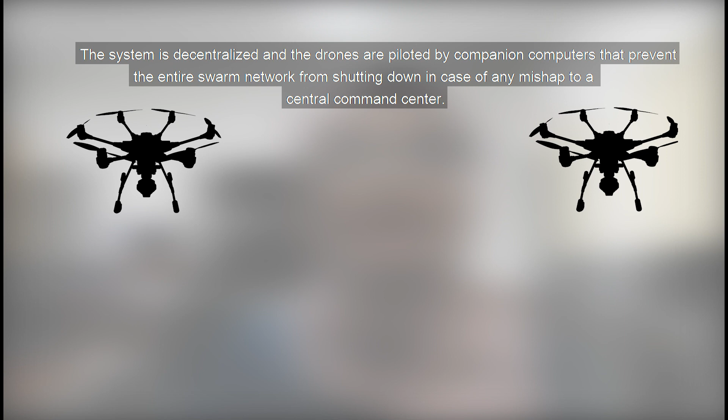For search and rescue operation, we have developed a system that utilizes a swarm of unmanned aerial vehicles to effectively look for search targets by scrutinizing their surroundings in a coordinated fashion. A multi-drone system has been adopted as it is efficient, reliable, and robust. The system is decentralized and the drones are piloted by companion computers that will run the entire swarm network without shutting down in case of any mishap to a central command center.

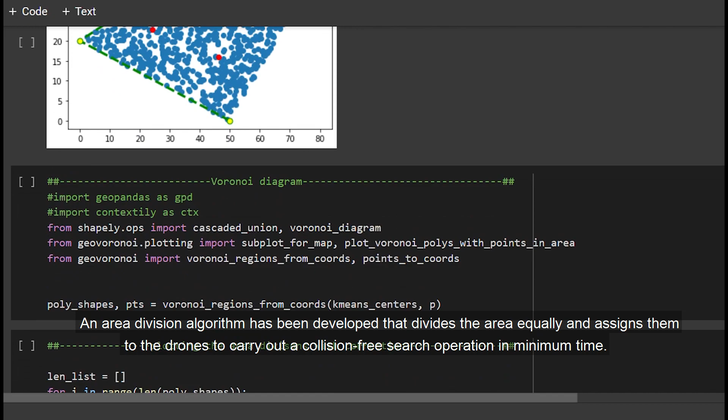An area division algorithm has been developed that divides the area equally and assigns them to the drones to carry out a collision-free search operation in minimum time. A survey algorithm follows that enables the UAVs to inspect their respective areas for ground markers. Throughout the mission, the drones remain in sync via an encrypted mesh networking protocol that ensures secure and reliable transmission.

The design is easily scalable. With slight modification, the system can be adapted for a wide array of tasks such as search and grab, commercial photography, aerial mapping, and geophysical surveys. We chose hexacopters as the multi-rotor configuration since they offer greater stability, last longer, and can carry heavier payloads.

The flight controller chosen was Pixhawk Cube, and the companion computer being used is Raspberry Pi 4B. The GPS system being used is Here3, a high-precision GNSS system. Drones communicate using the Zigbee protocol provided by XBees. The camera being used is a 720p Logitech C310, which has proved to be adequate for our use.

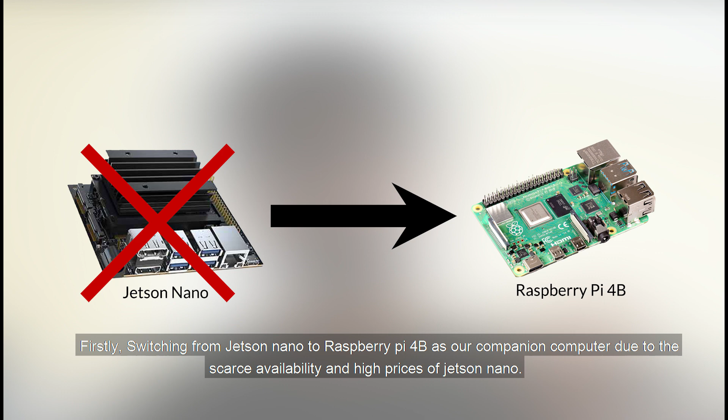Certain changes have been made since the last submission to cut down on our expenditure. Firstly, switching from Jetson Nano to Raspberry Pi 4B as a companion computer due to the scarce availability and high prices of Jetson Nano. Secondly, we dropped from 3 drones to 2 drones due to the high total cost of the required equipment. Thirdly, the 3D printed plate from the bottom of the hexacopter is now attached to the top for ease of assembly.

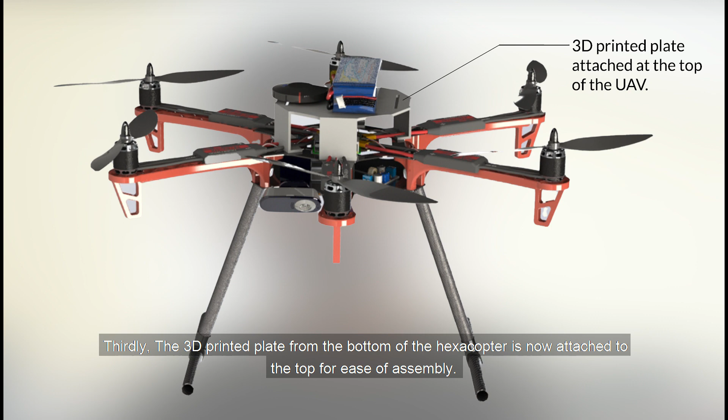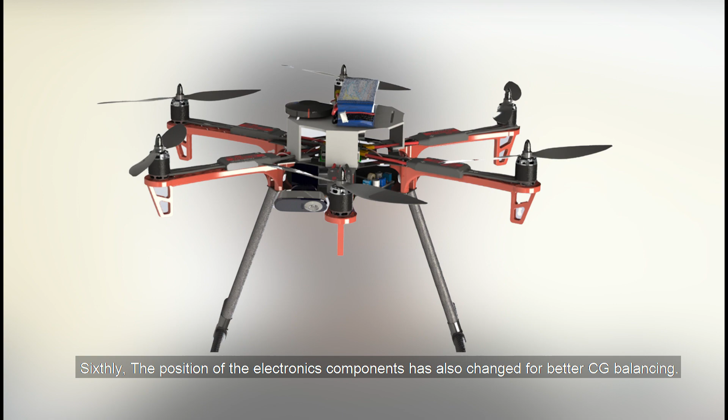Fourthly, a new payload mechanism has been designed and attached to the bottom plate. Fifthly, the gimbal has been removed. Sixthly, the position of the electronics components has also changed for better CG balancing.

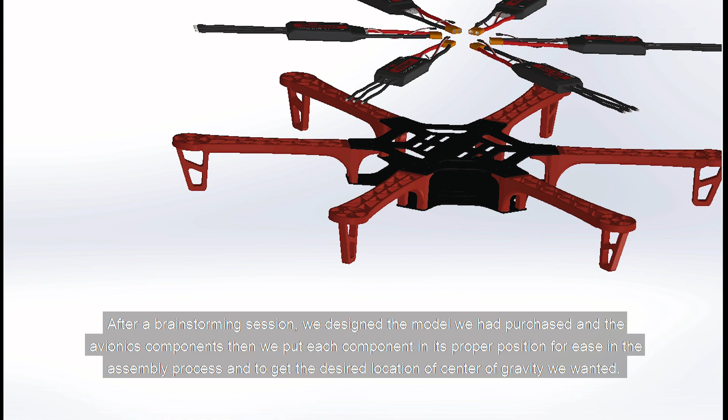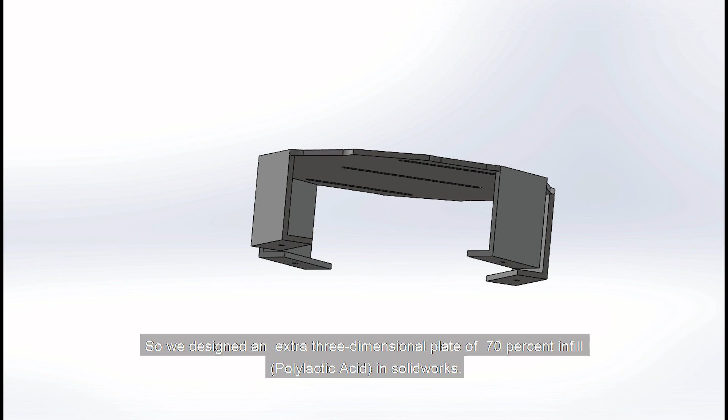After a brainstorming session, we designed the model we had purchased and its components. Then we put each component in its proper position for ease in the assembly process and to get the desired location of center of gravity we wanted. Center of gravity lies exactly at center as planned. We also modified the model according to our requirements, as there isn't enough space on 2 plates to house the hardware. So we designed an extra 3-dimensional plate of 70% infill polylactic acid in SolidWorks. Takeoff mass is around 2.5 kg.

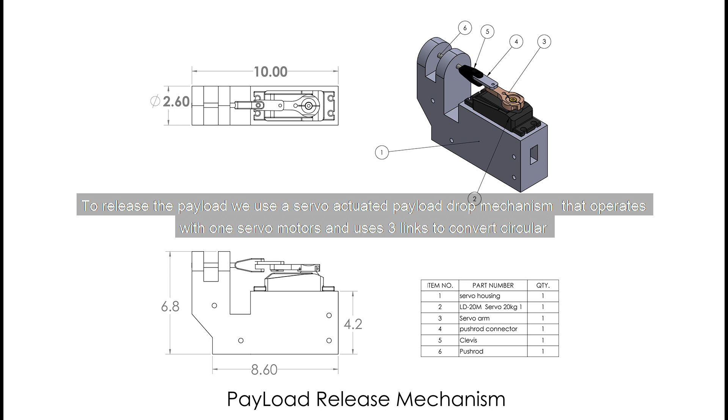To release the payload, we use a servo-actuated payload drop mechanism that operates with one servo motor and uses 3 links to convert circular motion of the servo to translational motion, like a slider crank mechanism, to drop the payload of 100 grams. When the UAV approaches the drop zone, the Pixhawk will actuate the servo which moves the push rod and releases the payload.

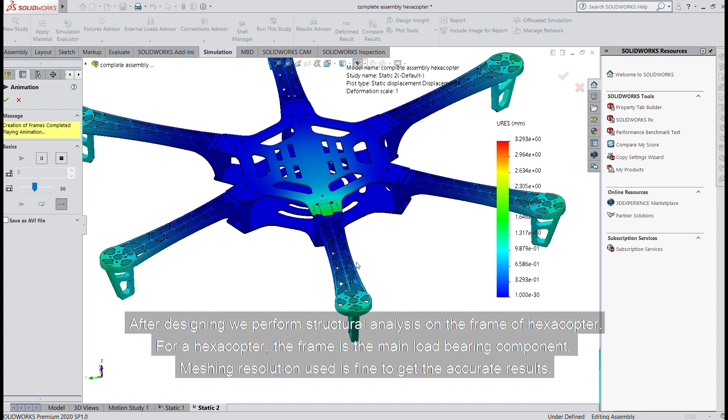After designing, we perform a structural analysis on the frame of the hexacopter. For a hexacopter, the frame is the main load-bearing component. Meshing resolution used is fine to get accurate results. When we apply 20 Newton of thrust on each motor, the displacement is just 3.29 mm and there is very little strain. The maximum equivalent stress obtained is 11.5 MPa as shown. The ultimate tensile strength of the frame material is 120 MPa.

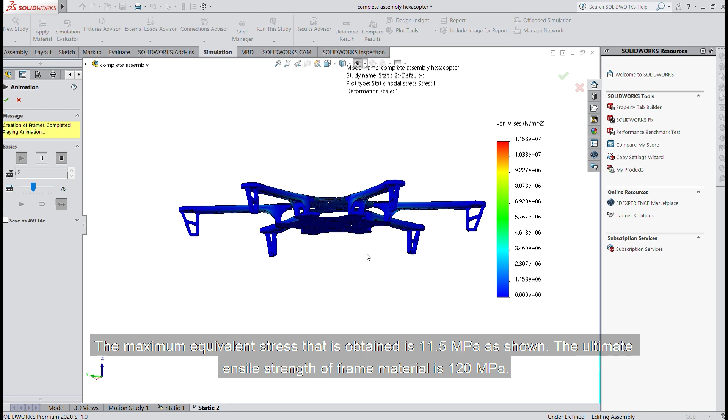Then we conducted a static structural analysis on the upper plate of the hexacopter. When we apply a force of 10 Newton on the top plate, we see very little deformation. Top plate material PLA has an ultimate tensile strength of 42 MPa. The obtained maximum equivalent stress is only 0.5 MPa as shown in the figure. As a result, the 3D printed plate can safely bear the stress.

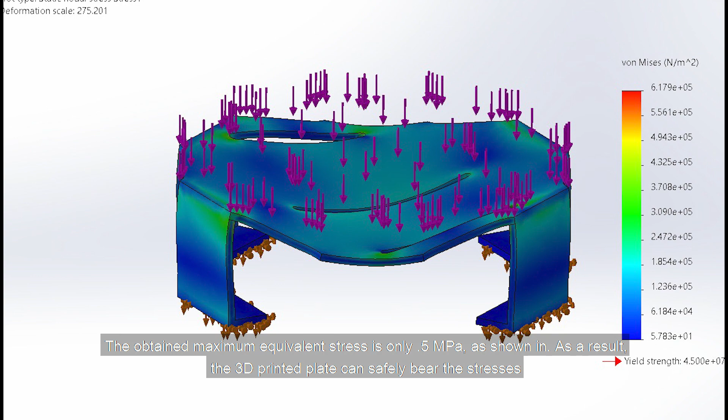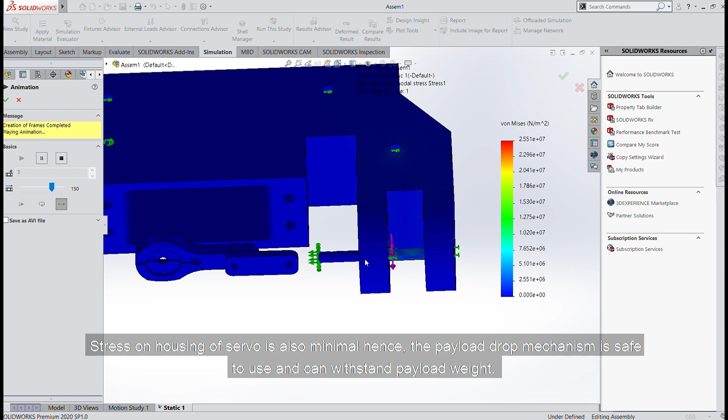In order to check the reliability of the payload drop mechanism to carry a 100 gram payload, 1 Newton of force has been applied on the push rod. It's found that very small deformation occurred on the push rod. The results obtained are within the limit when compared to the tensile strength of the material. Stress on the housing of the servo is also very minimal, hence the payload drop mechanism is safe to use and can withstand the payload weight.

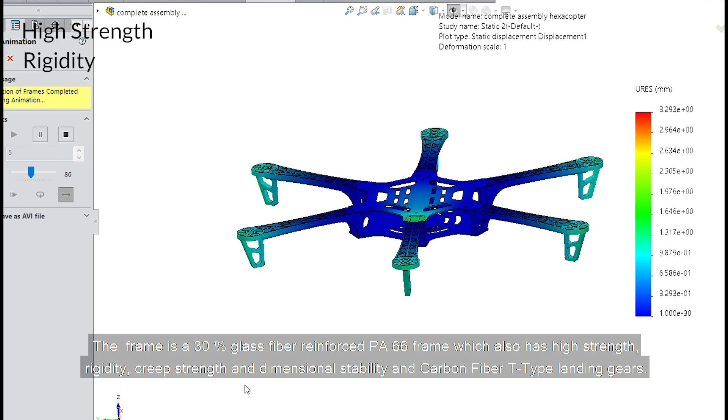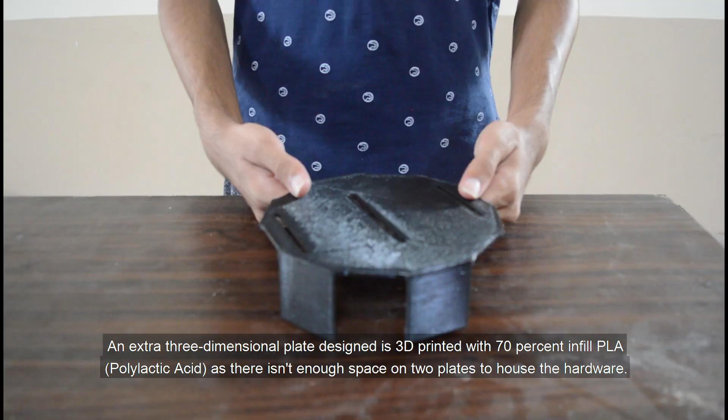The team has chosen to procure a ready-made 30% glass fiber reinforced PA66 frame, which also has high strength, rigidity, creep strength and dimensional stability, and carbon fiber T-type landing gears. We modify it according to our requirements. An extra 3-dimensional plate was designed in SolidWorks and 3D printed with 70% infill PLA polylactic acid, as there isn't enough space on two plates to house the hardware.

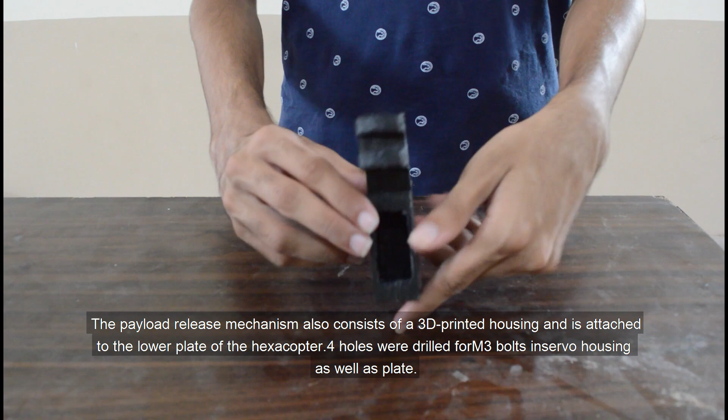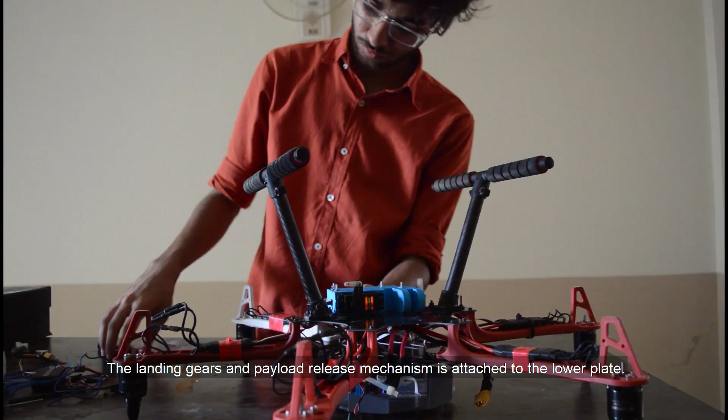The payload release mechanism also consists of a 3D printed housing and is attached to the lower plate of the hexacopter. 4 holes were drilled for M3 bolts in the servo housing as well as the plate. The DJI F550 consists of carbon fiber PCB frame boards screwed at the top and bottom of the PA66 GF30 arms. The landing gear and payload release mechanism are attached to the lower plate. The top 3D printed board is used for mounting battery and GPS. In the middle space we place the Pixhawk.

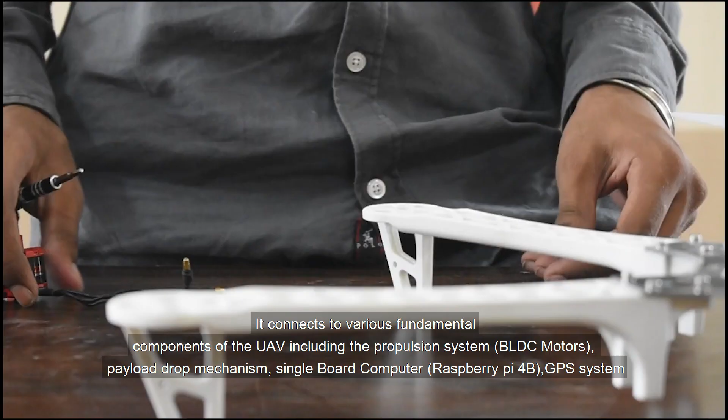The heart of our UAV system is the Pixhawk Cube Black. It is the flight controller for the UAV and controls all flight parameters. It connects to various fundamental components of the UAV including the propulsion system, BLDC motors, payload drop mechanism, single board computer Raspberry Pi 4B, GPS system along with XBee modules for communication purposes.

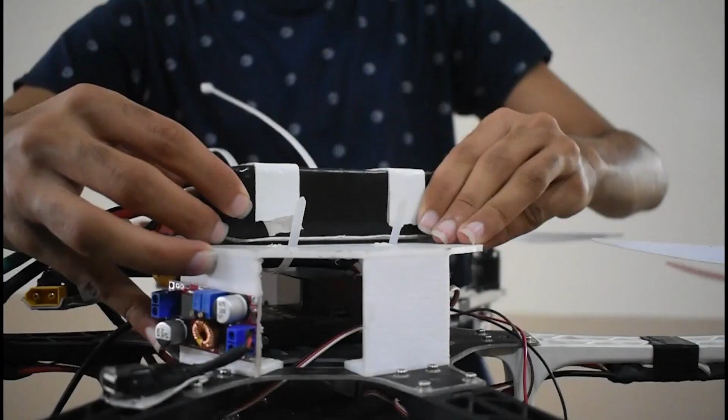The UAV is powered by a lithium polymer battery with a 3S configuration. The battery is connected to a PDB, power distribution board, from which the Pixhawk, motors and Raspberry Pi are powered. In the lower section we place the Raspberry Pi single board computer and the XBee modules.